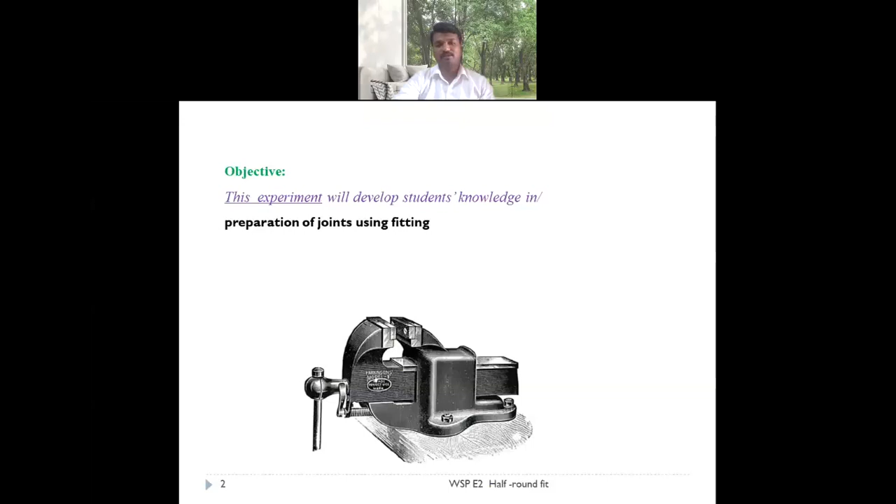In this particular video session, we will be seeing what is fitting and the experiment number 2, how to prepare a half round fit. The objective of this experiment will be that student will develop knowledge on preparation of joints using fitting, and outcome would be upon completion of this experiment, student will be able to perform various joints in fitting, especially the half round fit.

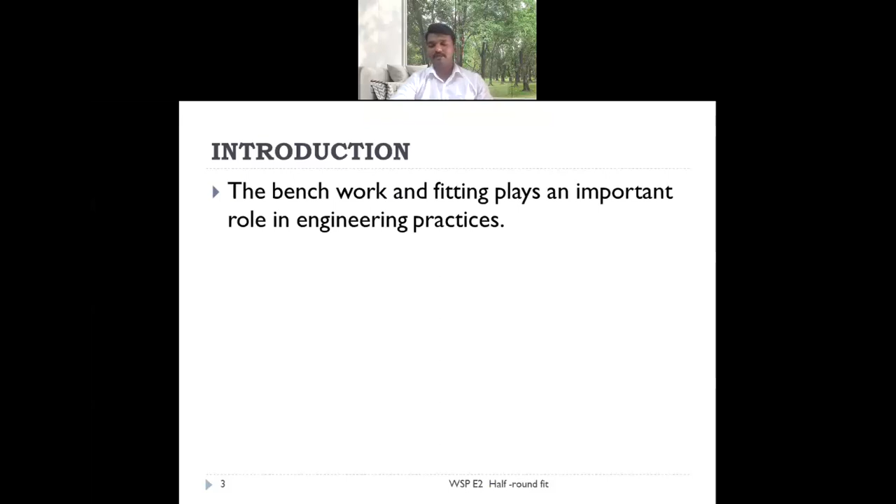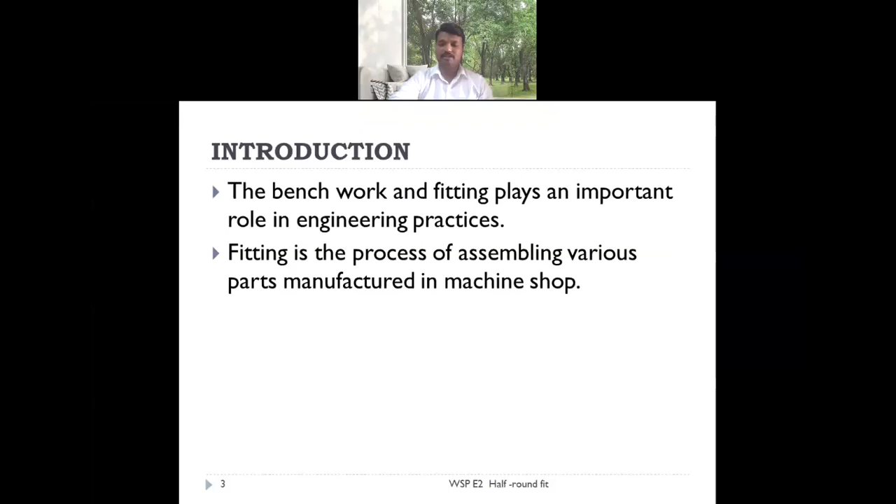Introduction. The bench work plays an important role in engineering practices. So fitting is a process of assembling various parts manufactured in the machine shop. The parts finished in machining operations often require hand operations to obtain desired finish and fit. And these operations are usually performed on bench. Therefore, it is called as bench work.

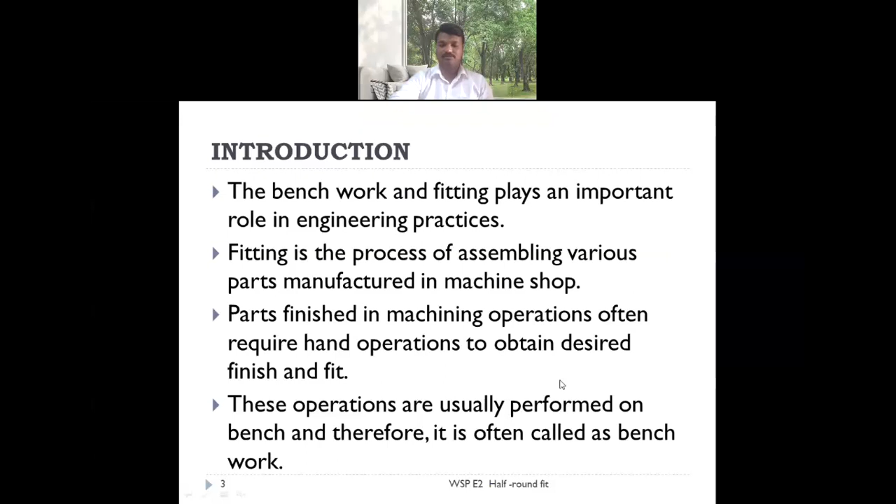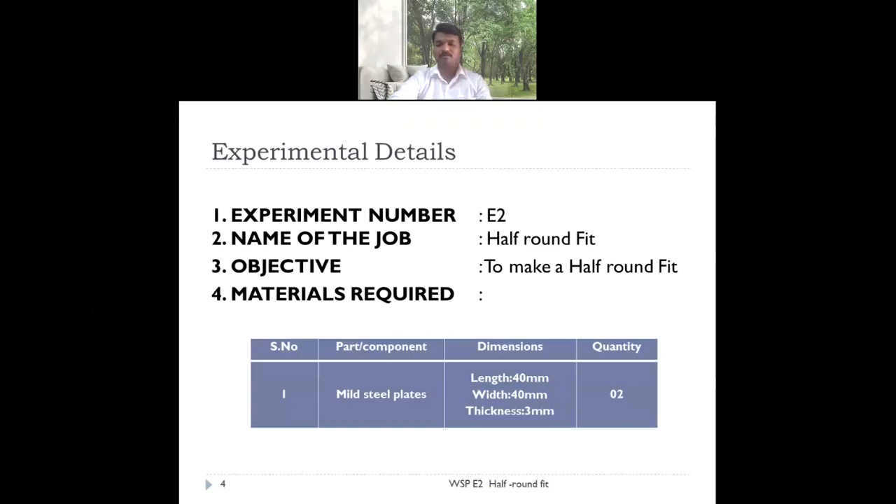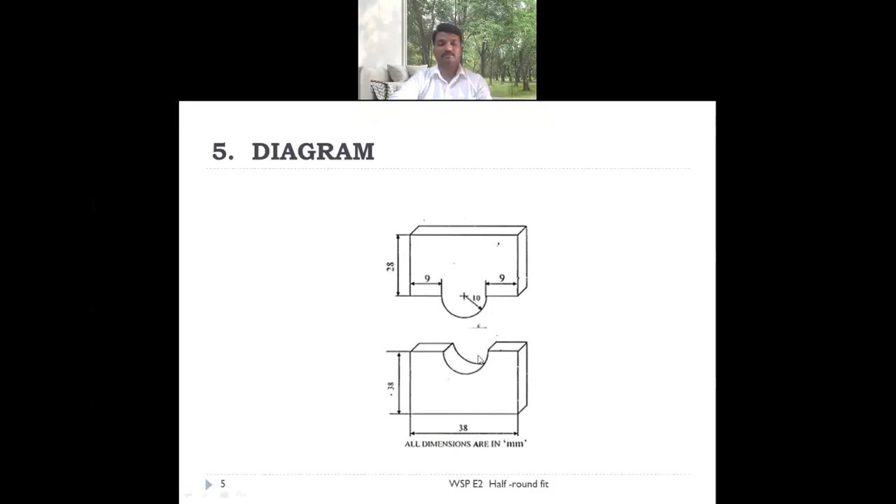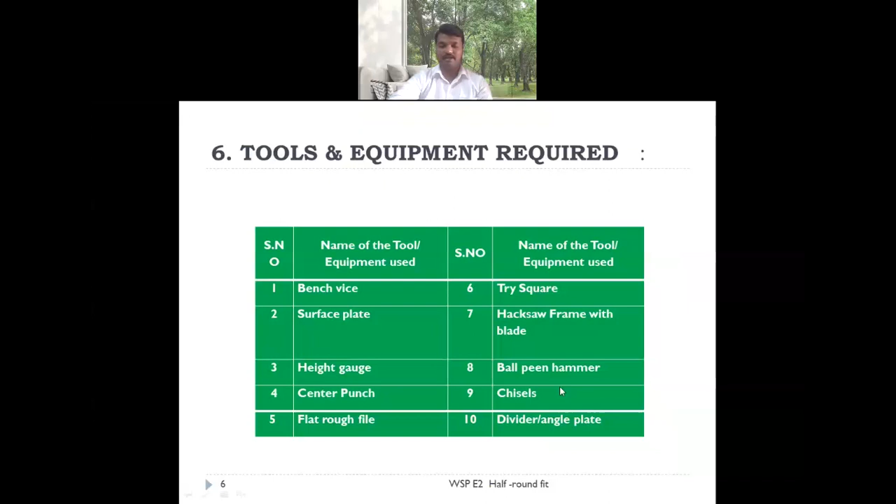We require a surface plate. Surface plate generally it is used to check the flatness of the workpiece, and it has very fine limits of the surfaces. The material generally used for the surface plate is cast iron.

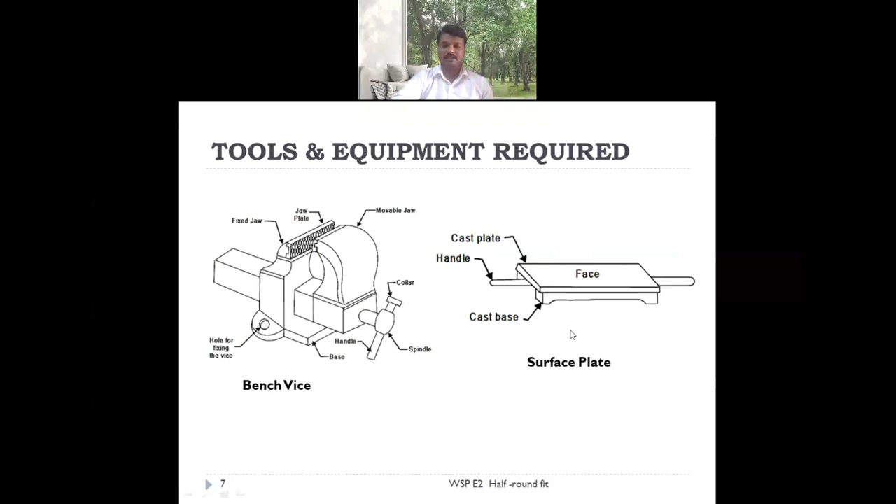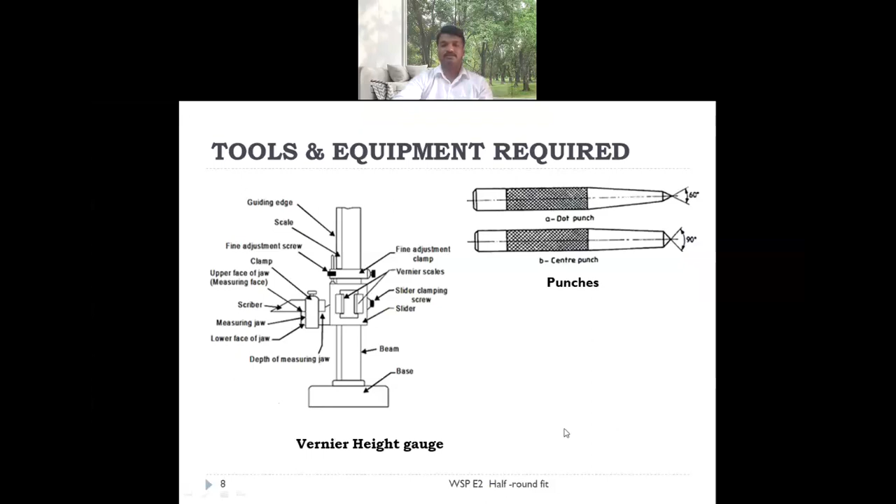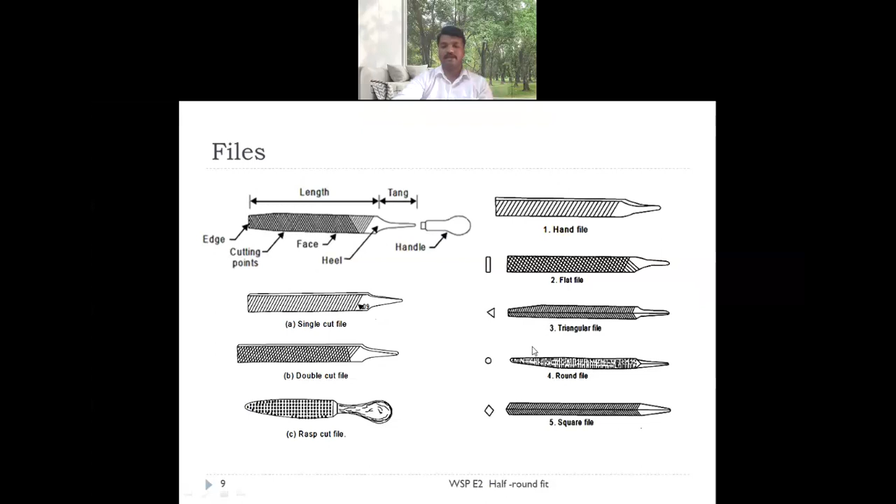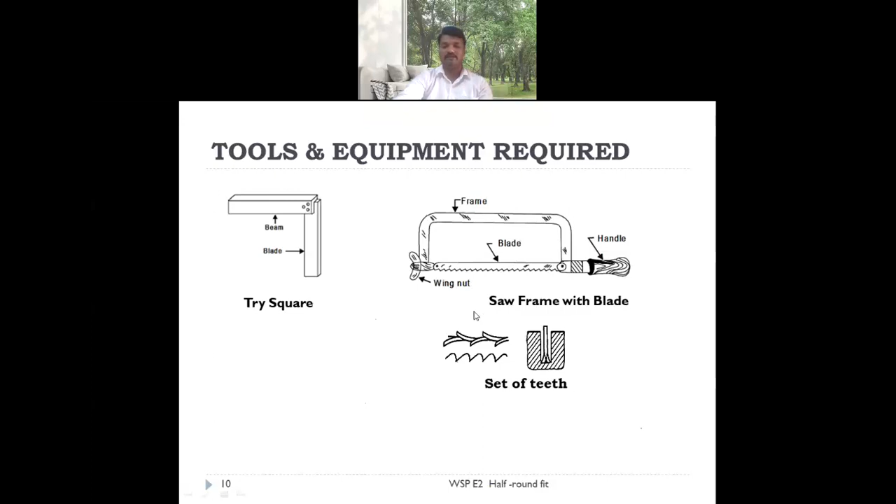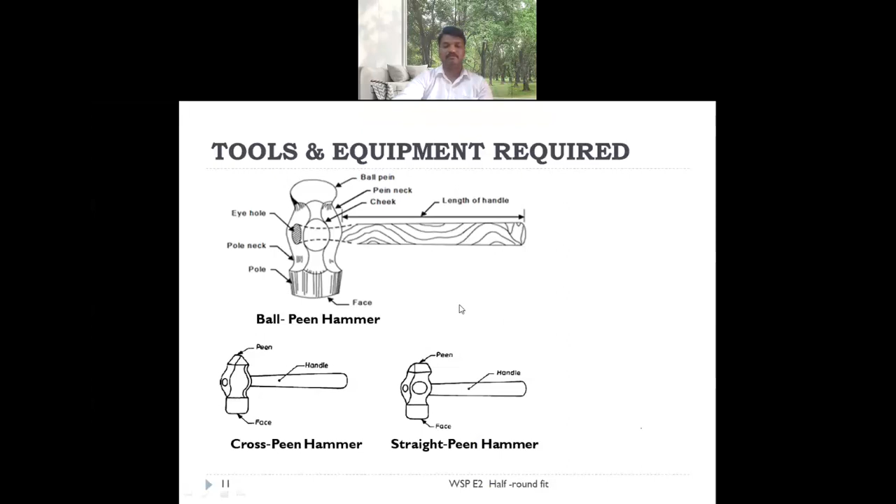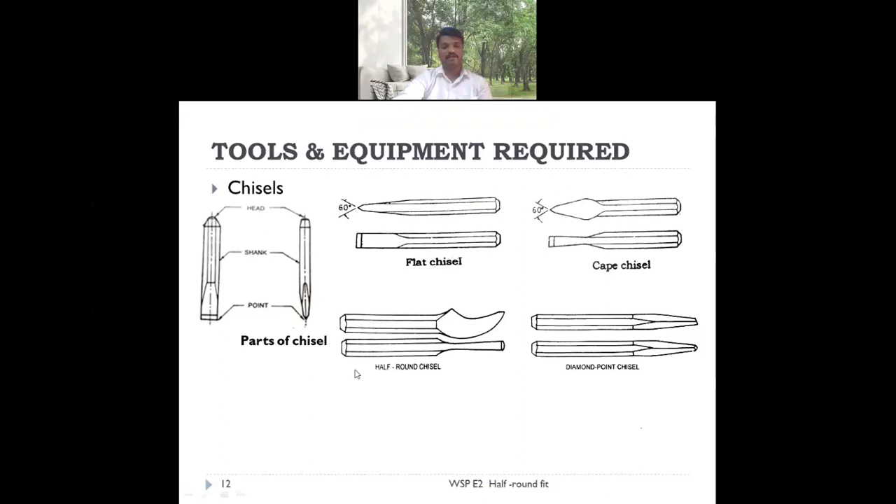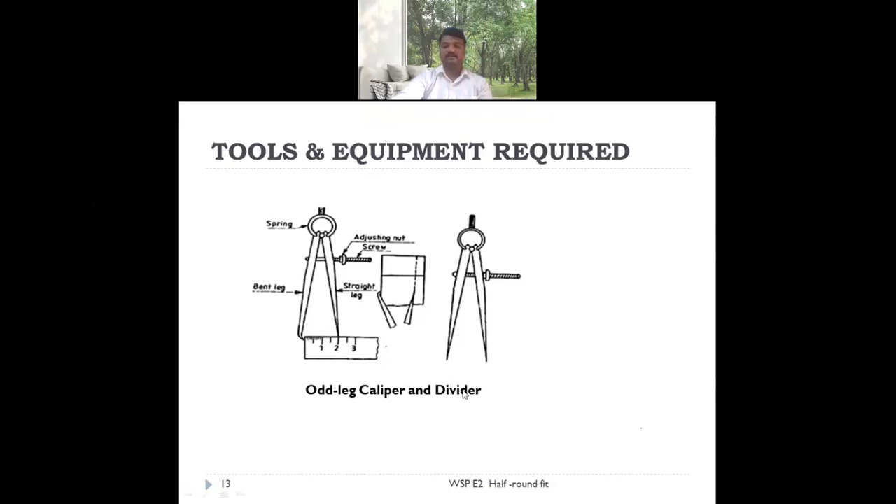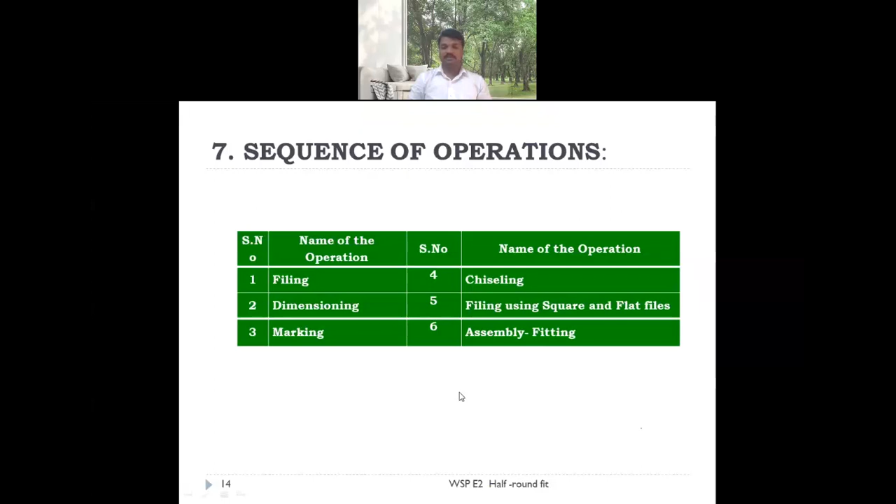In these experiments, we follow a sequence of operations. The first operation is filing, second is dimensioning, third is marking, fourth is chiseling, fifth is filing using square and flat files, sixth is assembly or fitting. Let us see the video of how to perform this experiment.

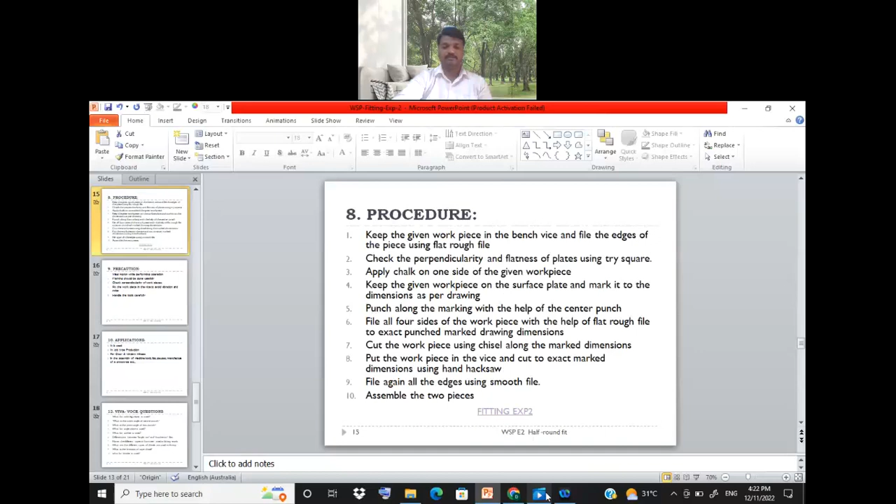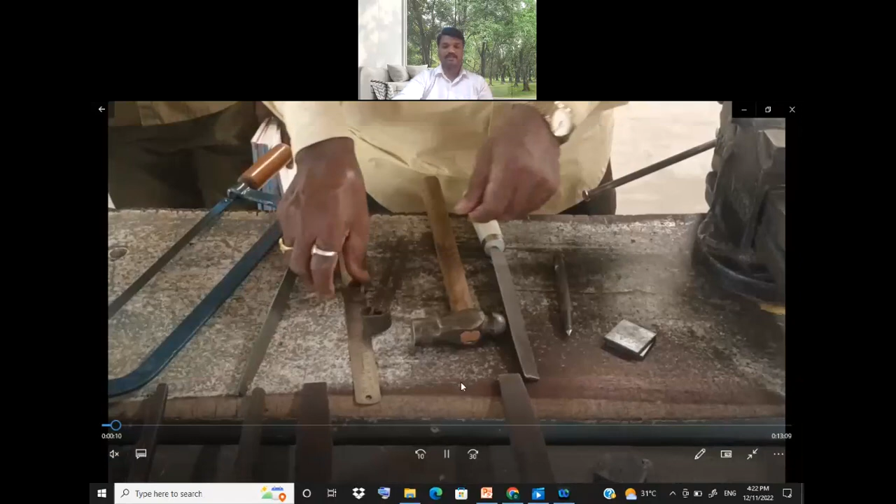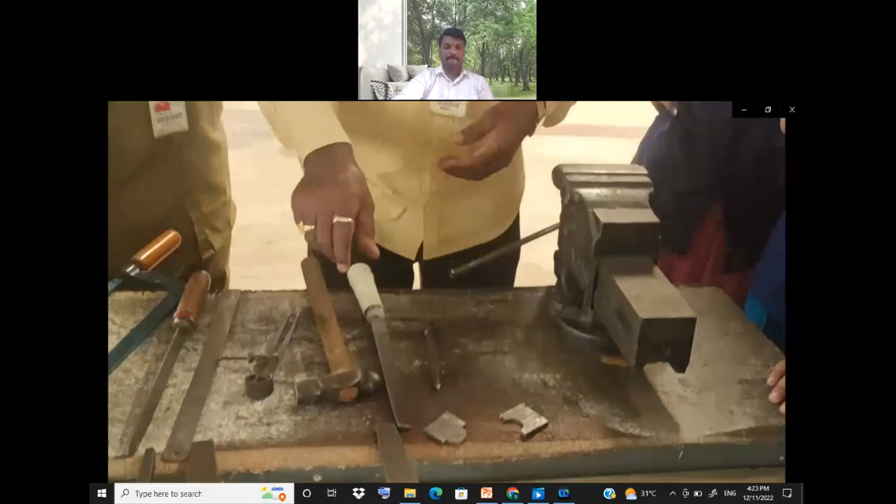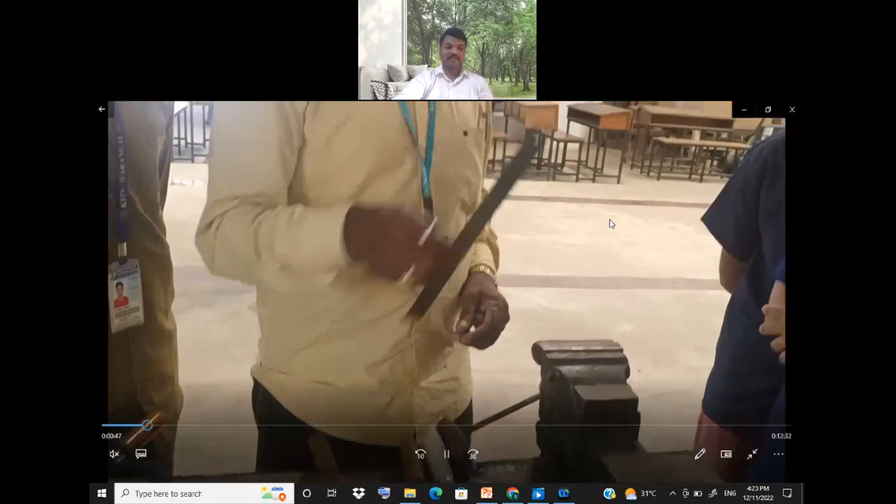Here you can see different types of files, try squares. These are the two metal pieces on which we have to perform this experiment called half round fit. This is the flat file, this is the half round file or round file, this is the triangular file, this is the center punch, ball peen hammer, divider, steel rule, hacksaw frame with blade, try square.

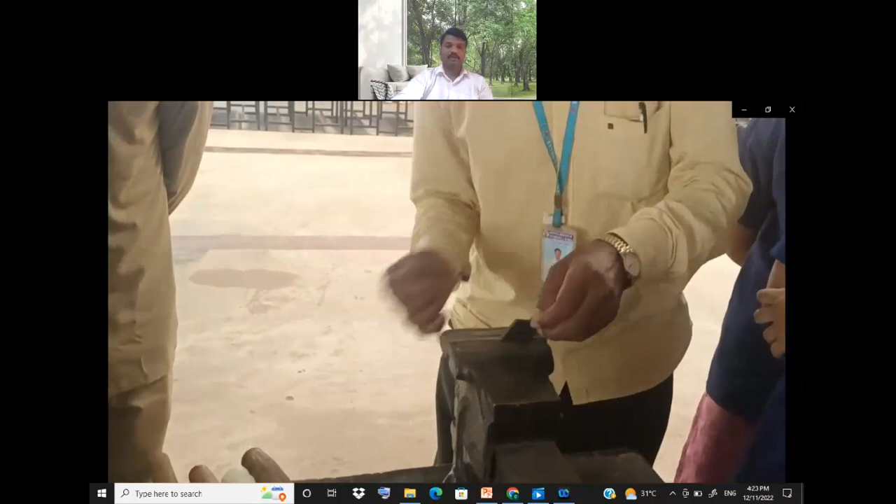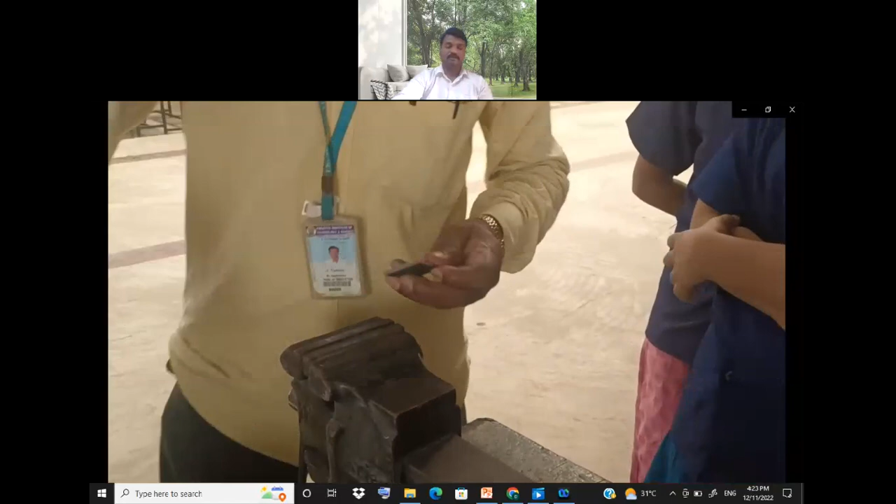We'll take the two metal pieces. The first metal piece is inserted in the bench vise and we'll do flat rough filing. After this filing is made, we use a try square to check the squareness or perpendicularity of the metal. If there is any deviation in dimension and it is not perpendicular, we again do the filing with the help of the bench vise.

This try square is continuously used in the filing section to check the accurate dimension of the workpiece. Again we try to check the squareness of the workpiece. I think now it's okay.

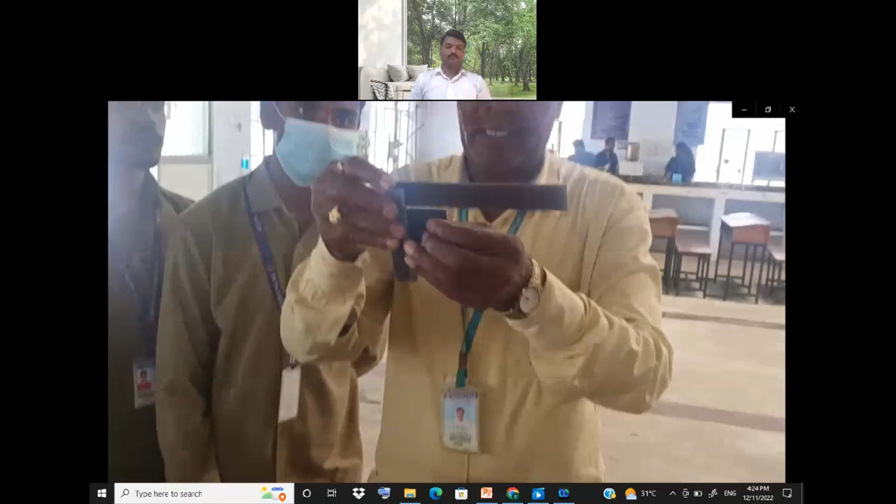Then we will insert another mild steel workpiece into the bench vise and file it again with the help of a flat rough file and check with the try square. There is a little gap here in this metal when measured with the try square.

Then again we'll insert it in the bench vise and do filing. Filing has to be done carefully such that the required amount of material in the required quantity is removed so that it is squared or perpendicular. As you can see, the filing here is done with the rough file where a small quantity of material is being removed.

Now after doing filing, we will apply chalk on one side of the workpiece. We can use a wet chalk and apply it on one side of the metal pieces.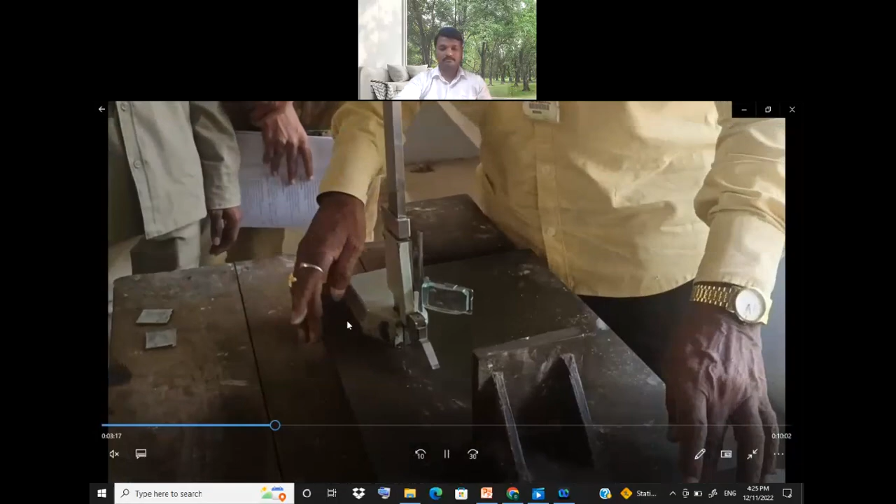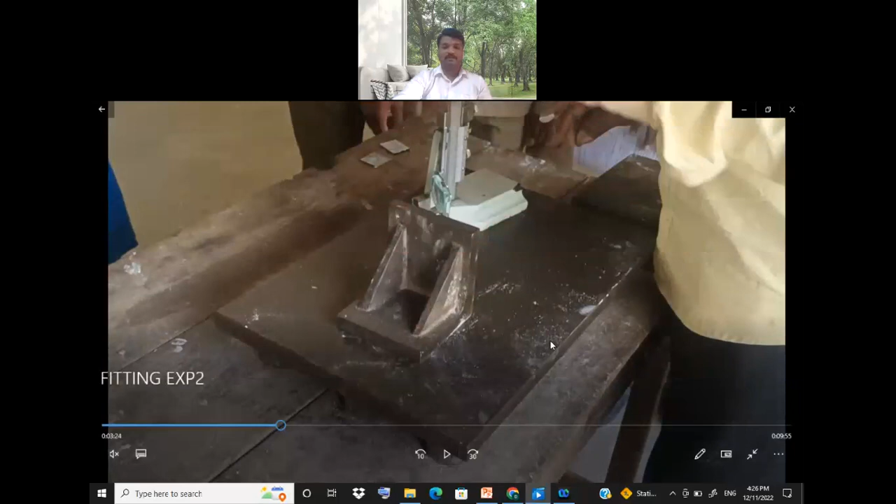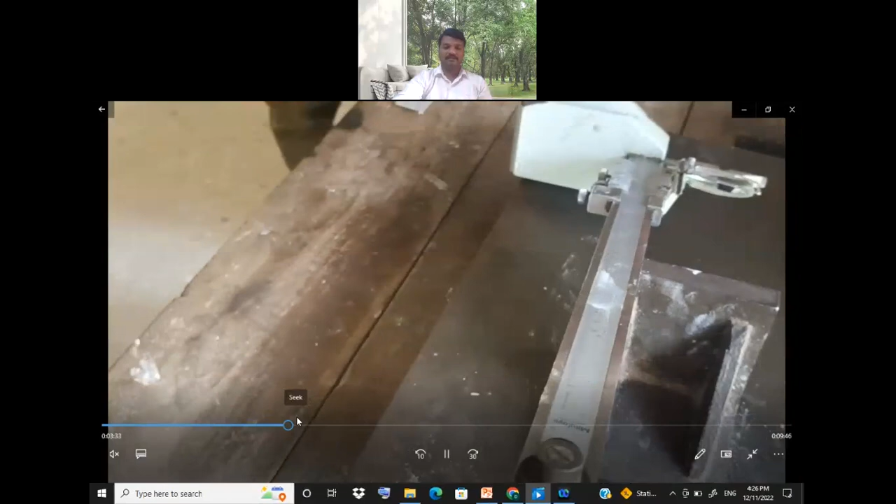We require a surface plate, an angle plate, and a vernier height gauge. As discussed previously, this vernier height gauge consists of an inch scale and a centimeter or millimeter scale on the other side. It consists of a knob. The zero should coincide with the main scale of the vernier height gauge, which gives us the final dimension of the material. So we should check where the zero of the vernier scale is coinciding on the main scale.

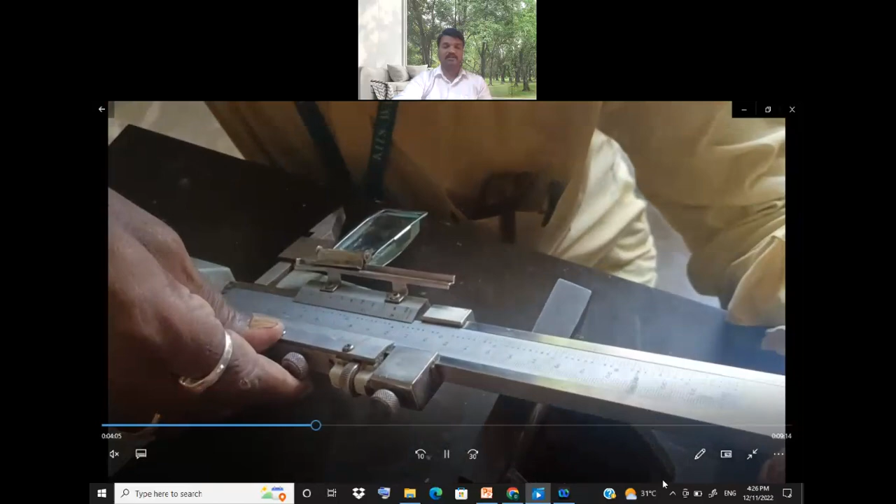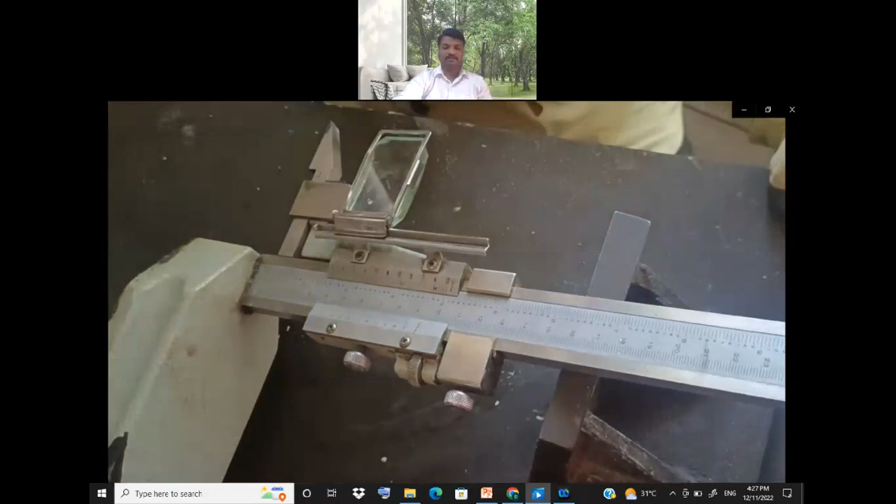Here we can clearly observe that if we require a 40 mm length on the material workpiece to be marked, we have to adjust that zero to that particular height and fix it. Then we have to make it stand on its base, and then we can see our dimensions.

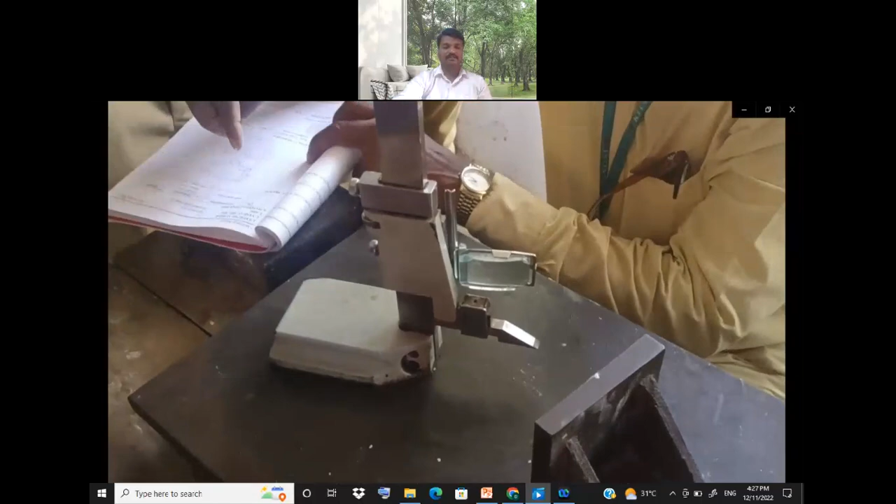What is the dimension given for us? Based upon the dimensions, we should mark our length on the workpiece. So here, the length we want to mark on the workpiece is already fixed, and we are scribing it on the metal workpiece where the chalk is applied.

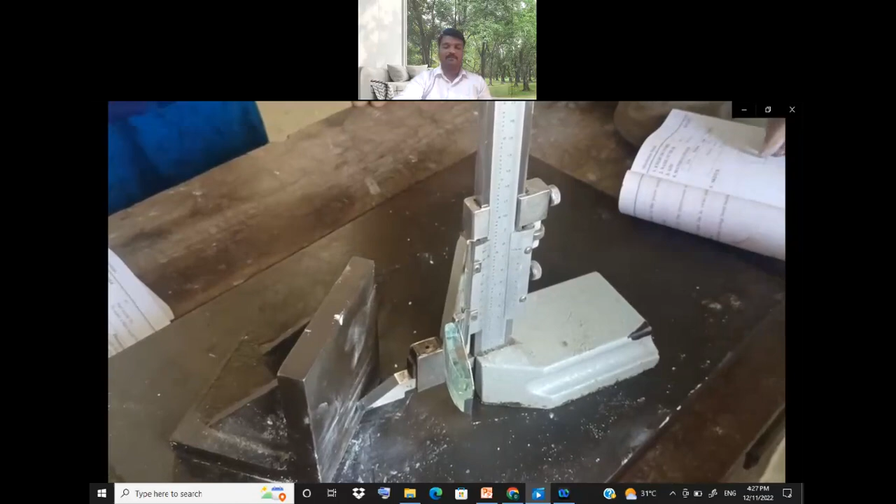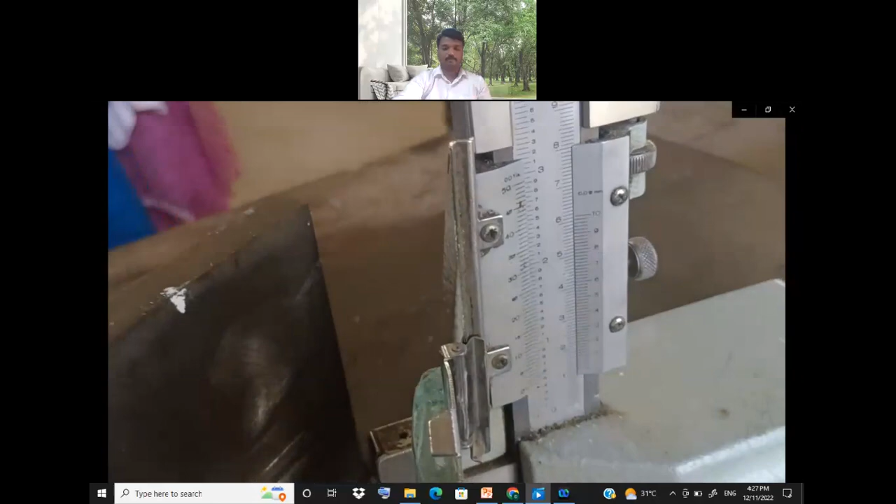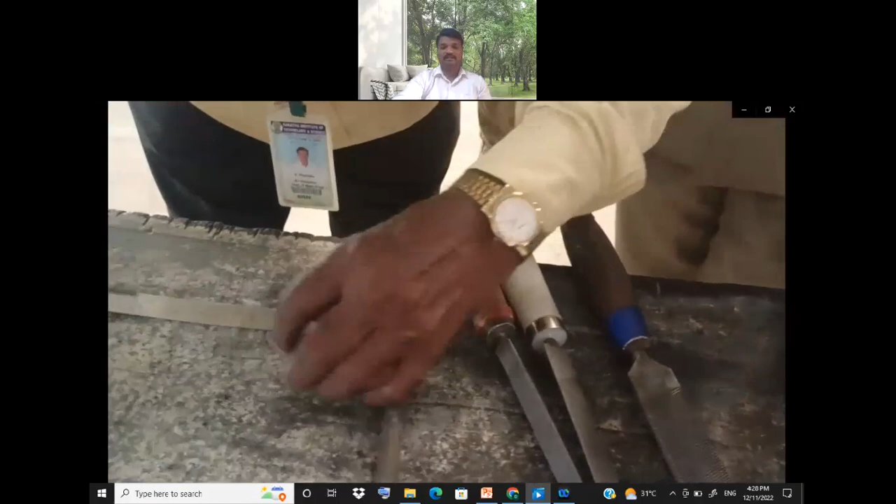Now after scribing with the help of the vernier height gauge, we take the center punch and further mark its indentation throughout the scribed area. First we are marking the centers in order to make the semicircle, that is the half round, on the metal.

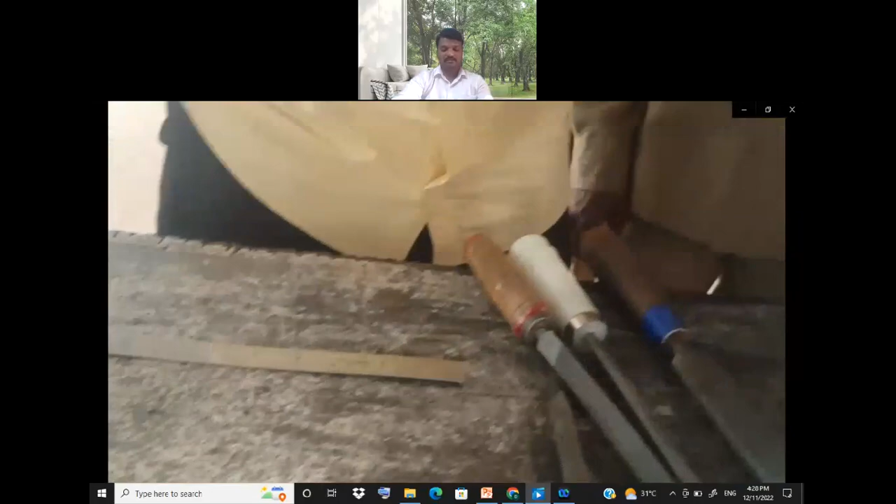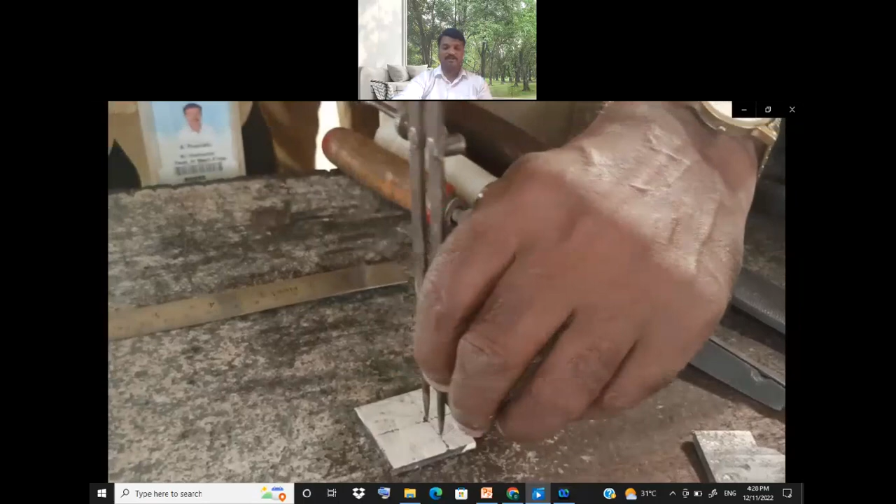As you all are aware, the center should have a radius of 10. So the 10 radius is measured, and the center is marked with the help of a center punch, and the radius is scribed on the surface of the mild steel plate where the chalk is applied. Now we can see the half circle, the half round, marked on the mild steel.

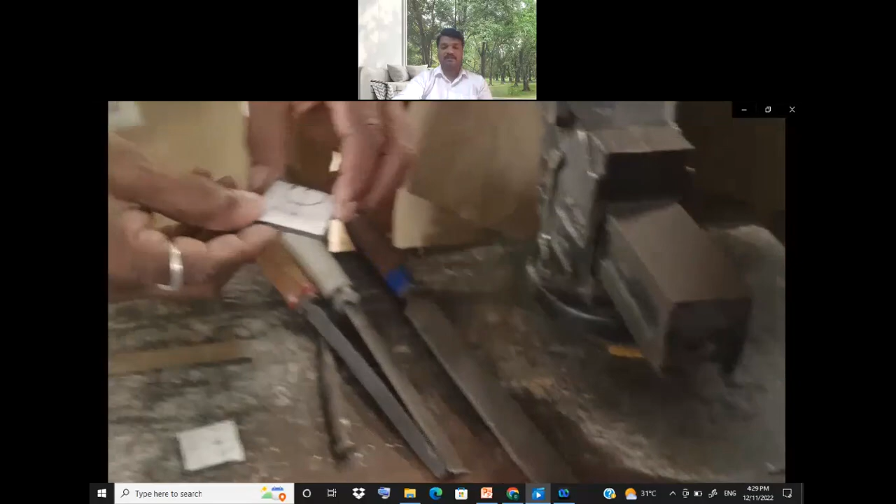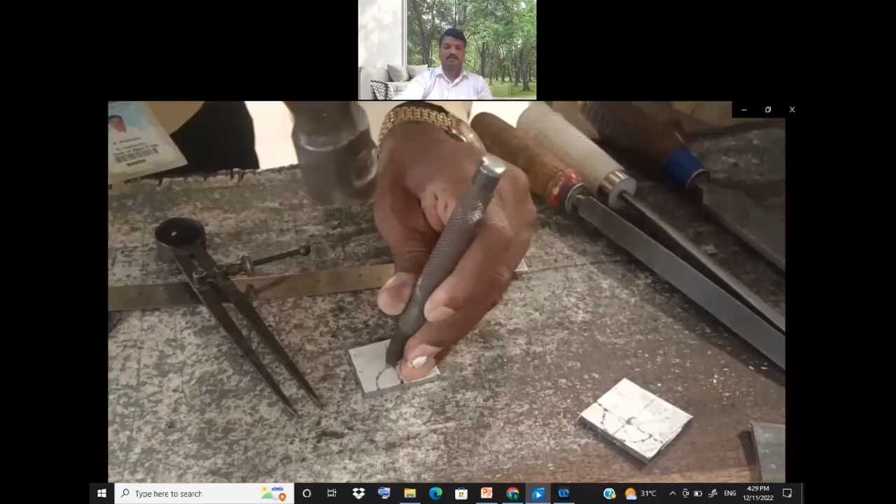The same half round is marked on the other mild steel workpiece, so one half round will be outside and another half round will be inside. Now we will take the center punch, and along the half circle, we will put indentations using the center punch. So the indentations are punched on the semicircle on both the plates here.

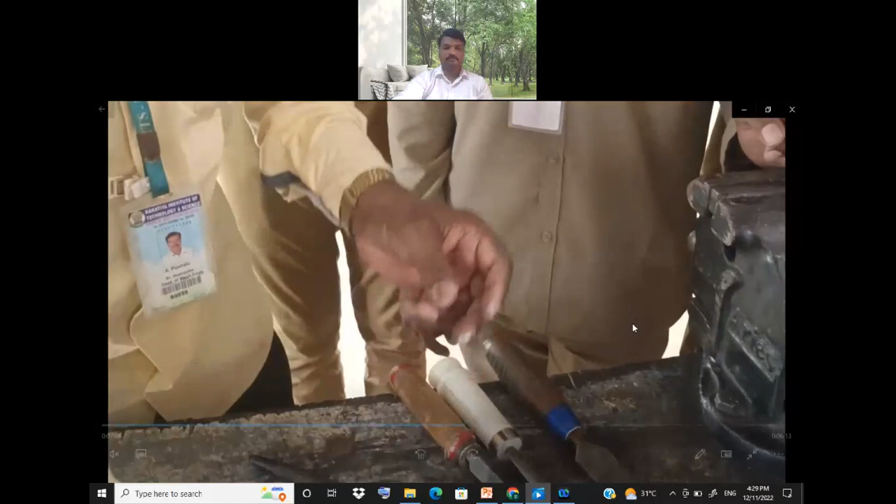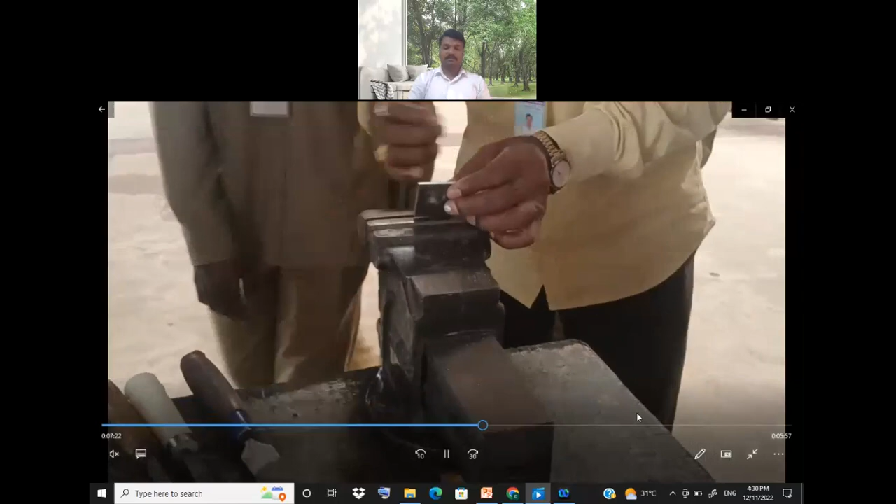Then we scribe the amount of material that has to be removed. We can't remove the material in that particular shape all at once, so material has to be removed phase-wise. First we remove the material linearly with a given amount.

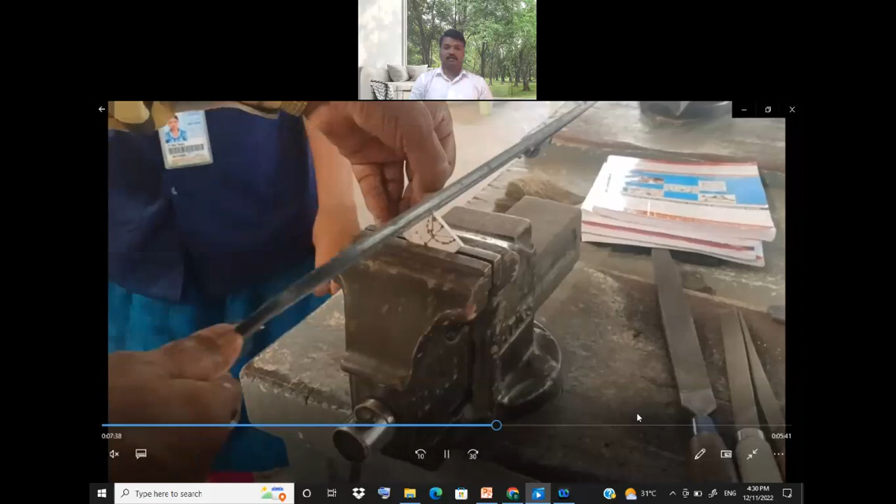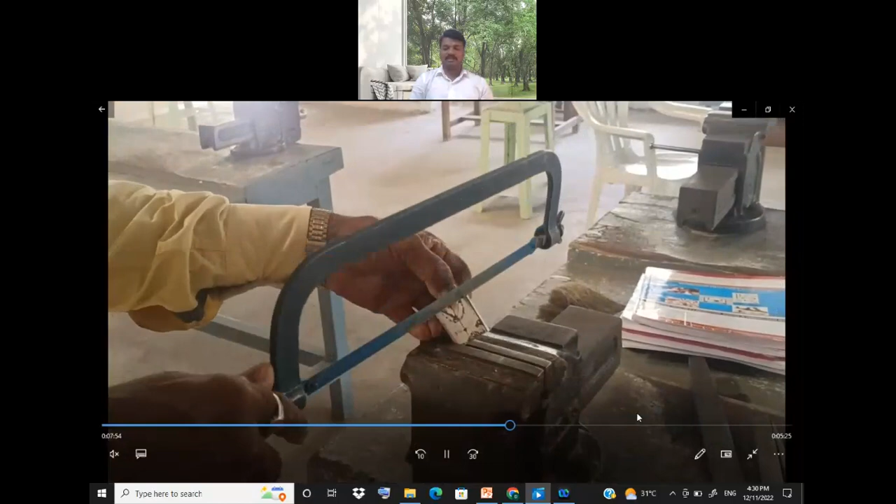We can't remove the material in the shape that is scribed on the metal workpiece directly. So for that purpose, we have to incline the workpiece in the bench vise such that the hacksaw operation can be performed easily. If the blade is bent during this operation, the blade will break down, so we have to ensure the blade used in the sawing operation is kept in a straight direction.

Now the excess amount of material has been removed with the help of a hacksaw. Now the inner circle, the inner half round, is made with the help of a half round file. Half round files are generally used to make the inner circles of the given radius.

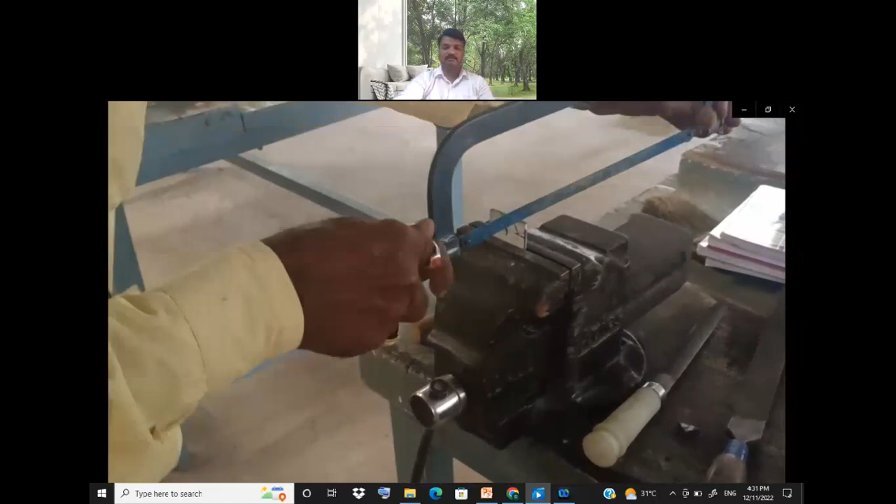Then we take the other half of the half round. For this workpiece, we have to remove material from both sides such that the half round is at the middle or center of the workpiece. So the major part of the material has been removed with the help of a hacksaw.

This way we will use the hacksaw to remove the material on both sides. Now with the help of a ball peen hammer, we try to remove the material that has been cut with the hacksaw. This process is called chipping. The material has to be chipped so that it will easily come off the workpiece after machining.

Precautions must be taken during the machining in the workshop. The hacksaw must be held properly, with a tight grip, such that you avoid injuring your fingers.

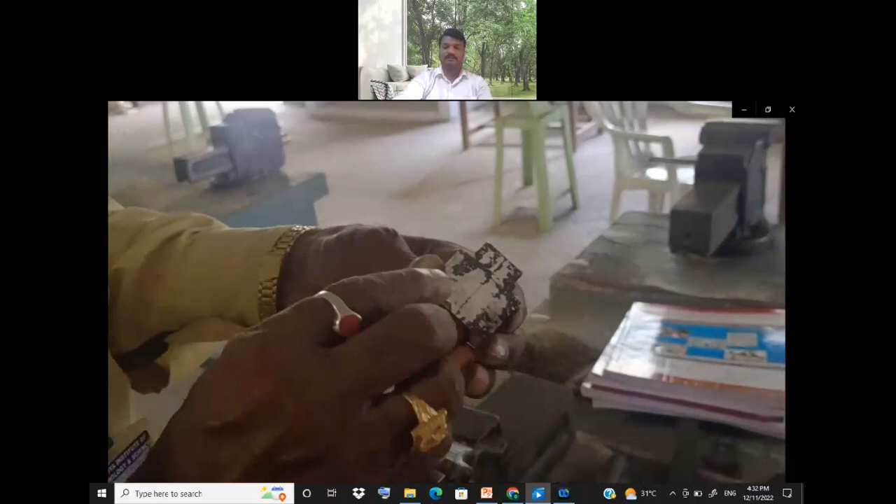Here we can see that again the metal workpiece is inserted in the bench vise. In this bench vise, we use different files to make the circular, round, outward projection.

We do not have any tools to make a circular projection outward, just like a half round file where we can make a circular projection inside. So for this, we need to use hand tools like a flat rough file to remove the material in small quantities and make it into a round shape.

We can also use triangular files for smoothing purposes because it has a corner. The half round consists of a corner at one side and another corner at the other side. So to make that corner smooth, we use the triangular file, now on the other side as well.

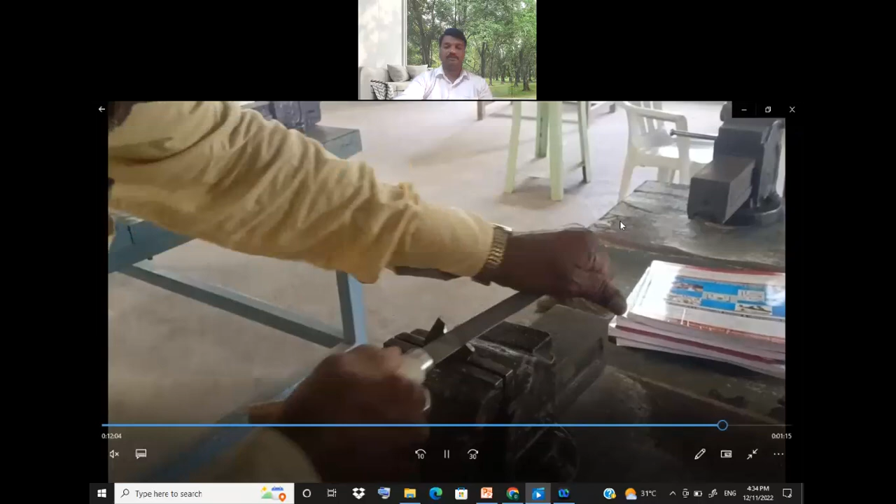So like this, we have to file the two workpieces, and then we need to check whether the half round that we have made is fitting inside the other half round of the mild steel plate. If there is any difference in the fitting, we need to do proper filing again.

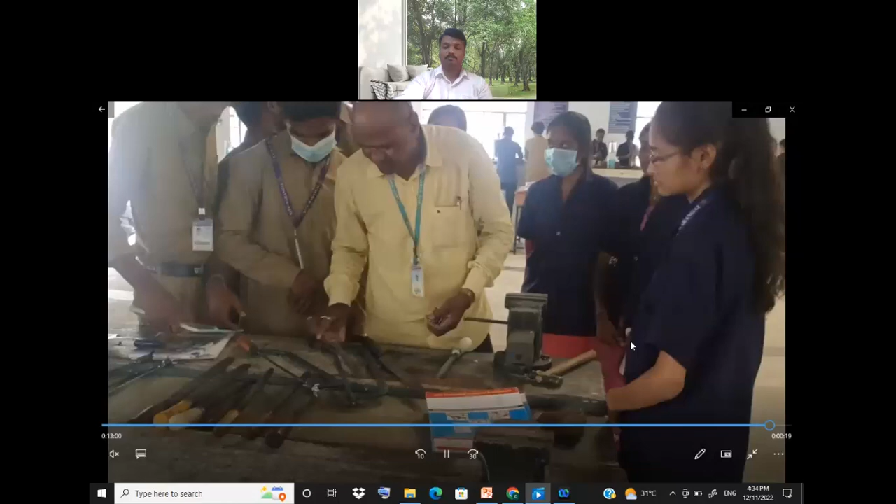Finally we can fit the two pieces, that is the half round fit, into an assembly. Now here we can see that we have made the half round fit.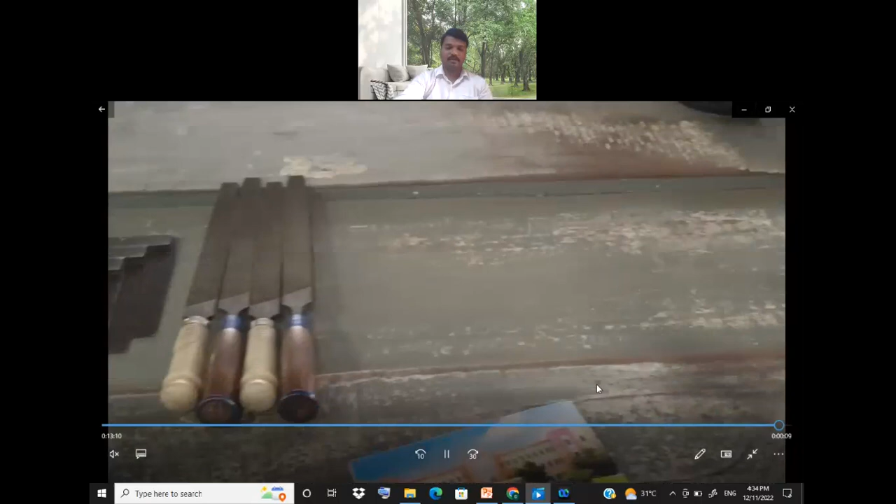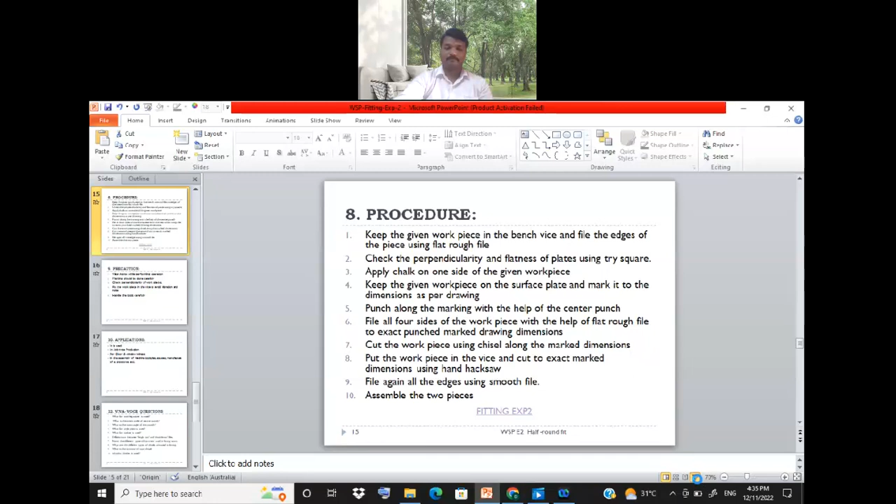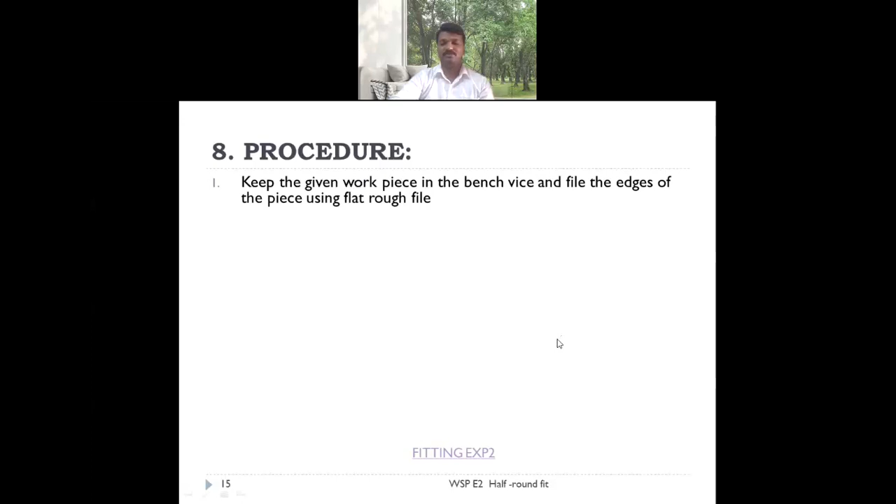That was about the experiment, how it is to be performed in the laboratory. Now once again I'll go through the procedure. Keep the given workpiece in the bench vise and file the edges of the piece using a flat rough file. Check the perpendicularity and flatness of the plates using a try square.

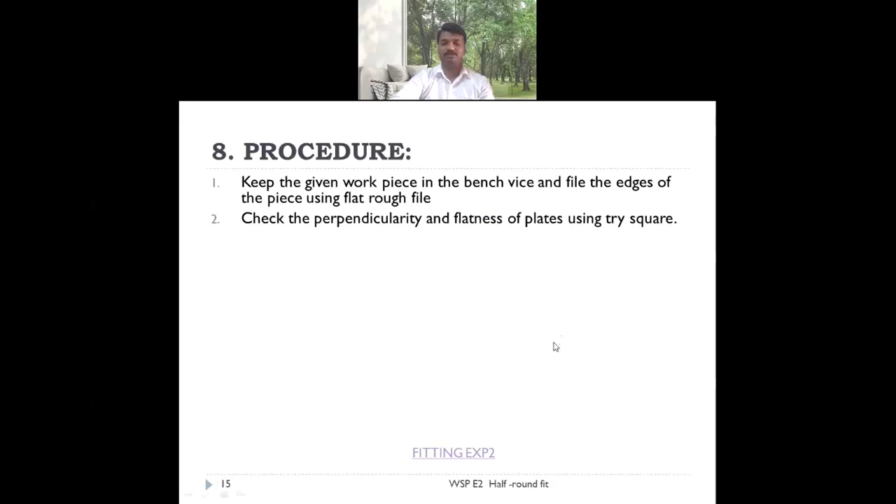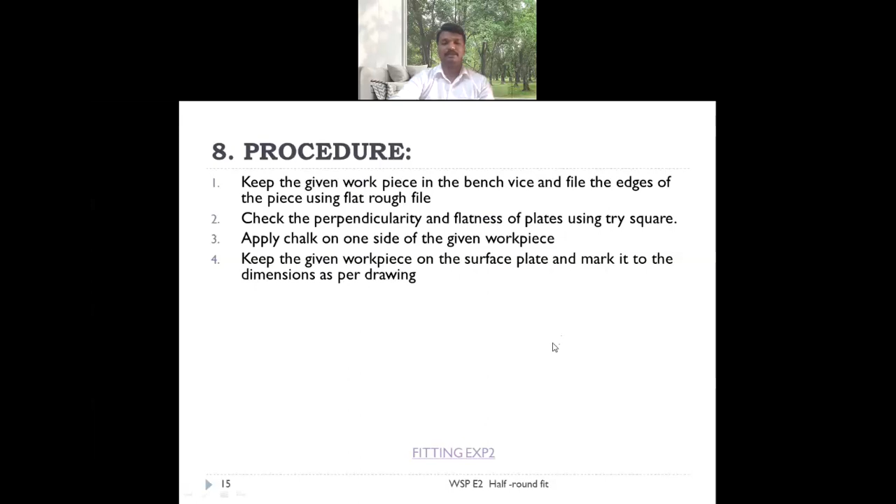Apply chalk on one side of the given piece. Keep the given workpiece on the surface plate and mark it to the dimensions as per drawing. Punch along the marking with the help of the center punch. File all four sides of the workpiece with the help of a flat rough file to the exact punched marked dimensions.

Cut the workpiece using a chisel along the marked dimensions. You can use chisels if the material can be removed with the help of a chisel. Put the workpiece in the vise and cut to the exact marked dimensions using a hand hacksaw.

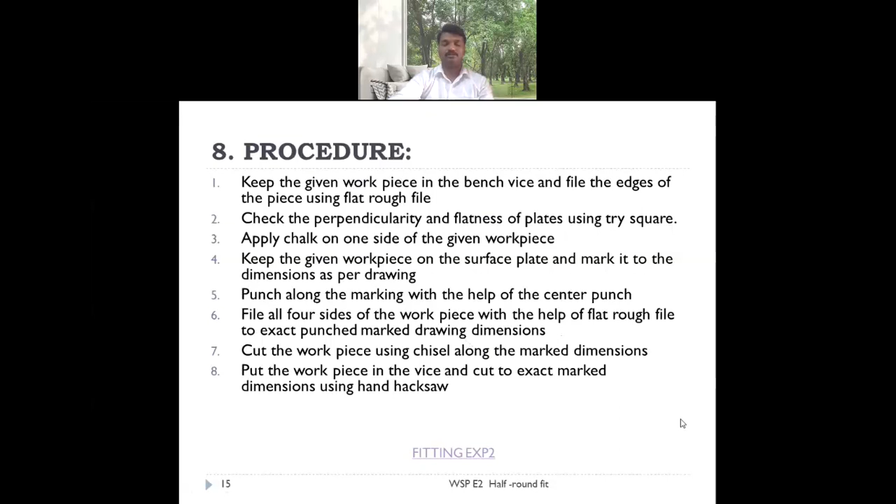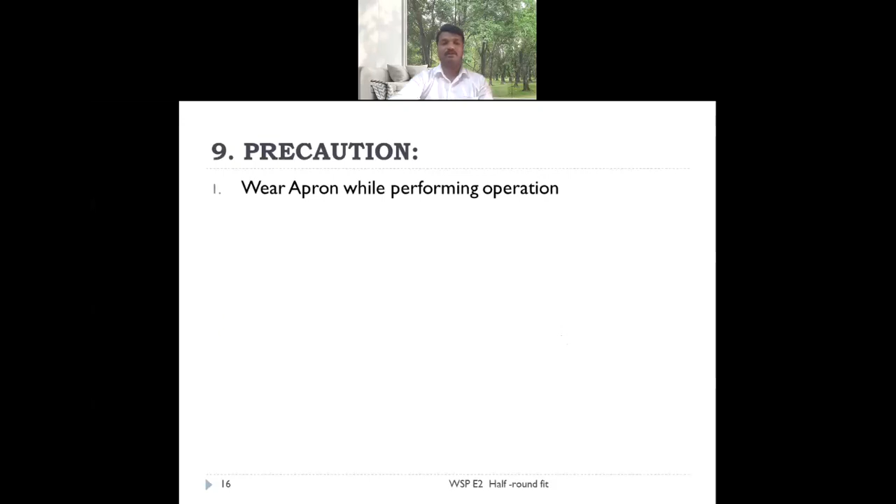That is the procedure again, recapped as a summary. Now the precautions are that we have to wear an apron while performing the experiment. Marking should be carefully done. We should always check the perpendicularity of the workpieces with the help of the try square.

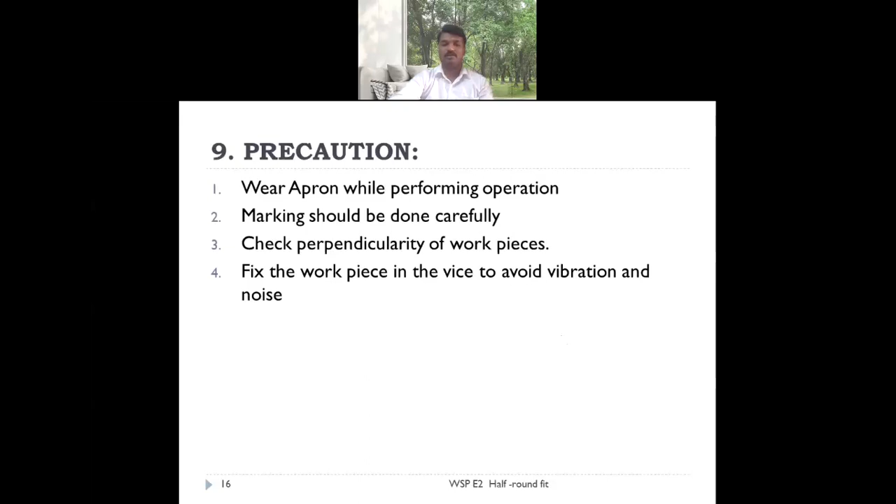Fix the workpiece into the vise, and vibrations and noise should be avoided by fixing it firmly in the bench vise. Handle the tools carefully - the hand hacksaw, the hammer, the filing that we do while we machine - they should be used very carefully.

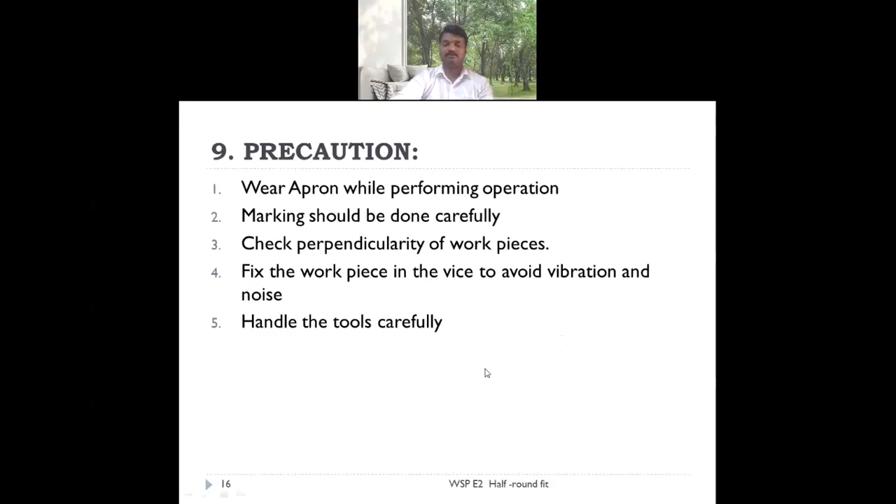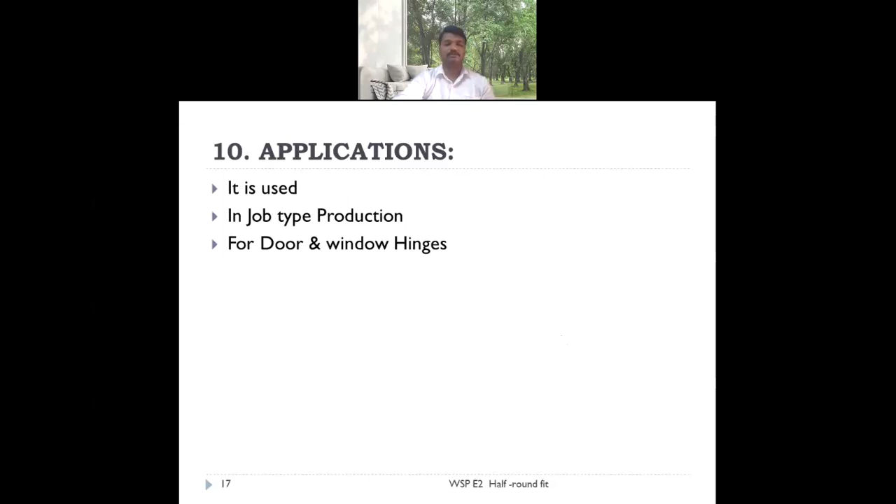The application of this particular experiment is that it can be used in job type production where products are made with the help of different hand tools, and we can use it for making door and window hinges, in the assembly of different machine tools, jigs, gauges, and manufacturing of prototypes, etc.

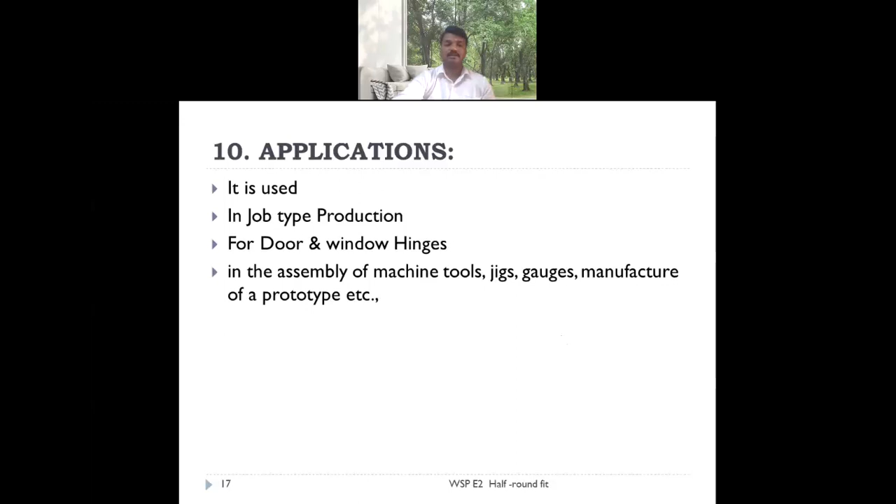During the lab session, the students are expected to write the viva questions in the manual that they have been supplied with.

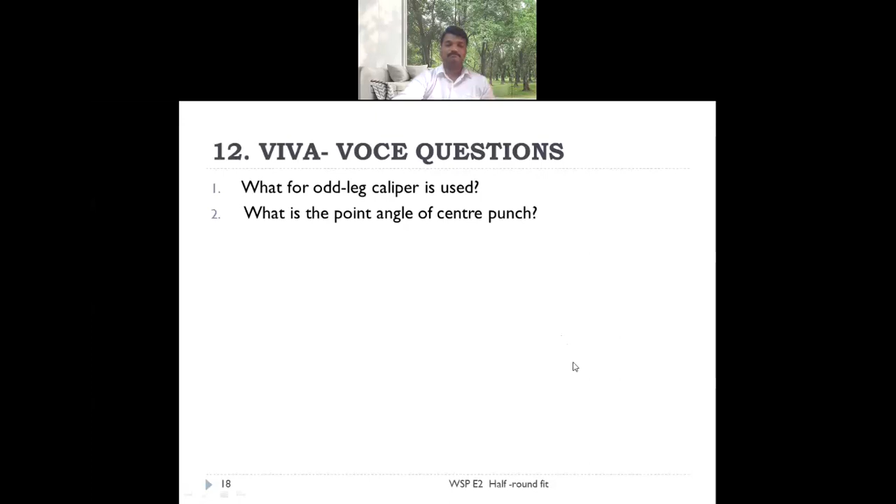What is odd leg calipers used for? What is the point angle of a center punch? What is the point angle of a dot punch? What is an angle plate used for? What is a scriber used for?

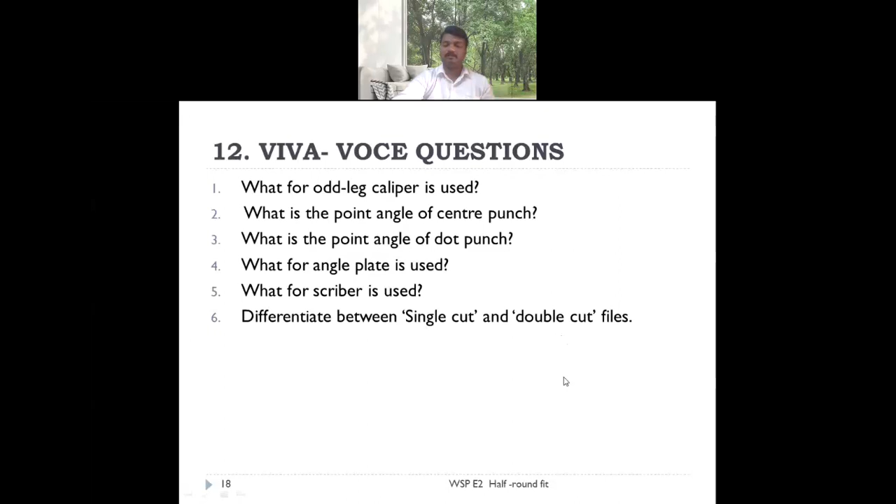Differentiate between single cut and double cut files. Name the different types of hammers used in fitting work. What are the different types of chisels used in fitting? What is the function of a cape chisel? And what is a divider used for?

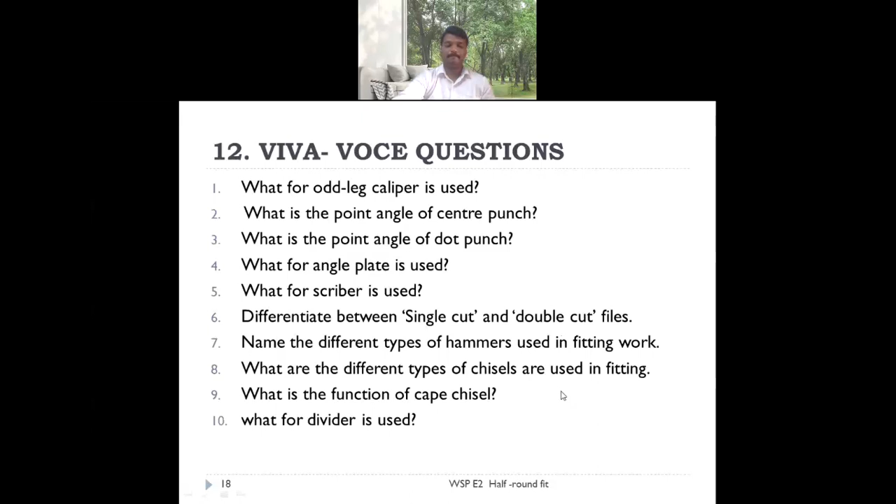The record work that the student is expected to complete in his laboratory manual is: the objective of the experiment, the diagram of the experiment performed, tools and equipment required and the purpose, sequence of operation, interpretation of the results and discussion, and what the student has learned from this experiment based on the objectives, and how they will apply the knowledge gained by performing this experiment in future.

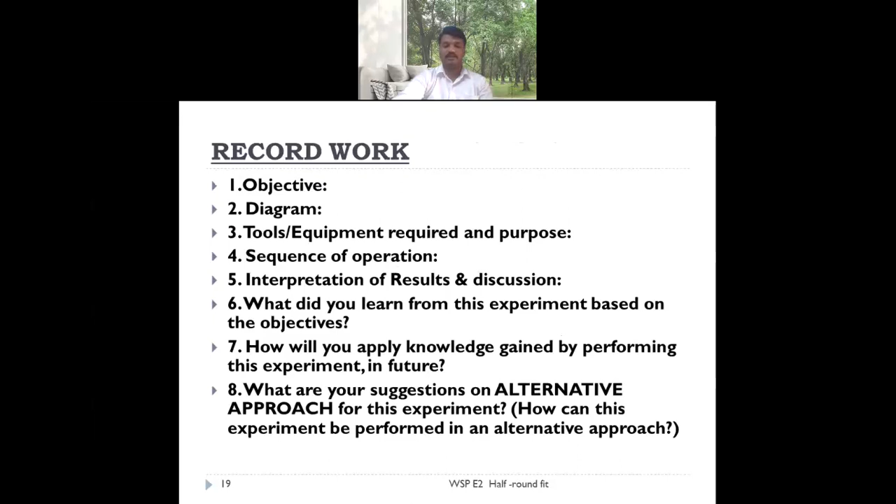And the suggestions on alternative approaches to this experiment - how can this experiment be performed in an alternative approach? What are your suggestions on extension of this experiment? Can this experiment be extended to improve the students' learning experience?

So these are the questions that students need to put their thoughts on in their own manual. And viva voce is performed at the end of the experiment.

So continuous internal evaluation consists of 40 marks, which includes 10 marks for knowledge. The student coming for the lab is expected to have the prerequisite knowledge on the experiment to be performed. P represents participation, K represents knowledge - how the student takes part in performing the experiment. W is for write-up, how the viva questions are written and what suggestions are made, and V is for viva, how the student has answered the oral viva voce questions. So it consists of a total of 40 marks.

So with this, I conclude this experiment, that is making the half round fit. Students, I wish you all the best. Perform this experiment in our workshop laboratory. Happy learning, thank you all.